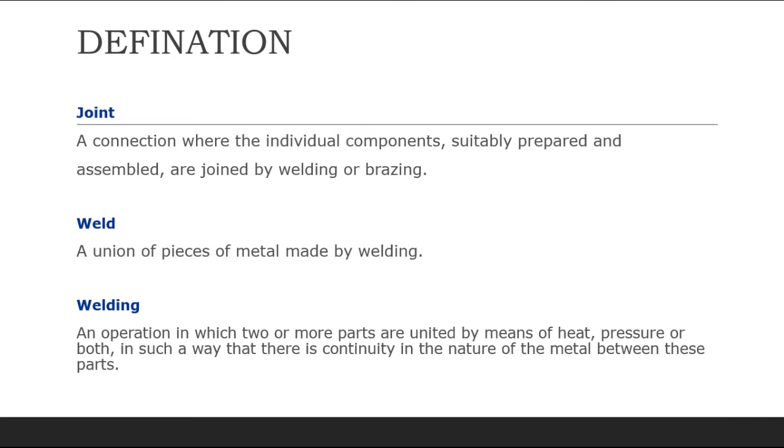Now friends, we will discuss welding - an operation in which two or more parts are united by means of heat, pressure, or both, in such a way that there is continuity in the nature of the metal between these parts. That is called welding. So in welding, friends, you can simply understand that two parts are there, and we weld them with the help of filler metal, by the help of heat, pressure, or both. This is called welding.

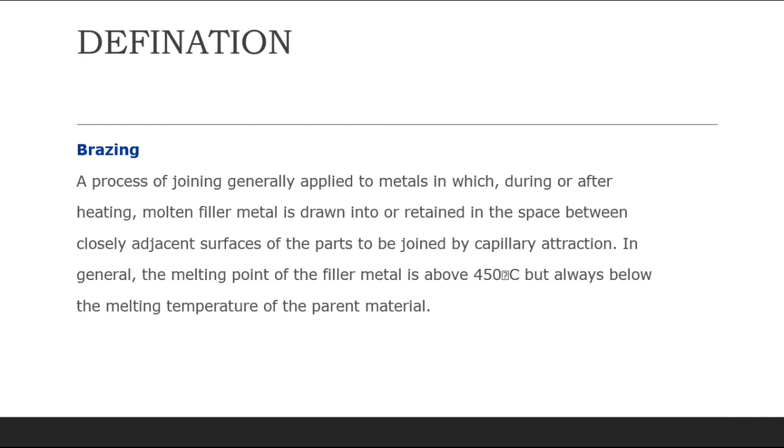So friends, next topic is brazing. Brazing is a kind of welding, but the main difference is that the filler metal has a characteristic in which, above 450 degrees centigrade, the filler metal gets melted and combines with the parent metal, forming a bond. So in brazing, the parent metal does not melt, because the temperature is only around 450 to 500 degrees centigrade. Only the filler metal melts and forms a layer on the parent metal - that is called brazing.

So friends, next we will discuss some joints, sketches and definitions. Number one, butt welding. In butt welding, two components are placed - this is basically a connection between end to end or edge to edge of two parts, and the angle between them is typically 135 degrees to 180 degrees. So you can see in butt welding, one end of the component and the second end of the component are joined, and this angle will vary between 135 to 180 degrees.

So second type is the T type. In T type, you can see two components going to weld. One component's end or edge will be welded with the other component's face. So you can see the connection between the end or edge of one part and the face of the other part. The parts make an angle to one another of more than 5 up to and including 90 degrees.

So the next type of welding is corner welding. In corner welding, you can see the two components have a connection between the ends or edges of two parts, making an angle to one another of more than 30 degrees but less than 135 degrees.

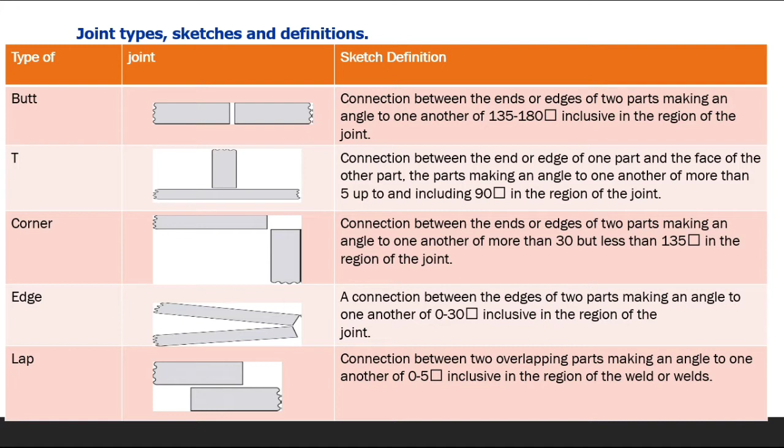So the last one is the lap. In lap, you can see the two parts having a connection between two overlapping parts. One part, and above it another part, overlapping the first, making an angle to one another of 0 to 5 degrees. So you can see all the joints.

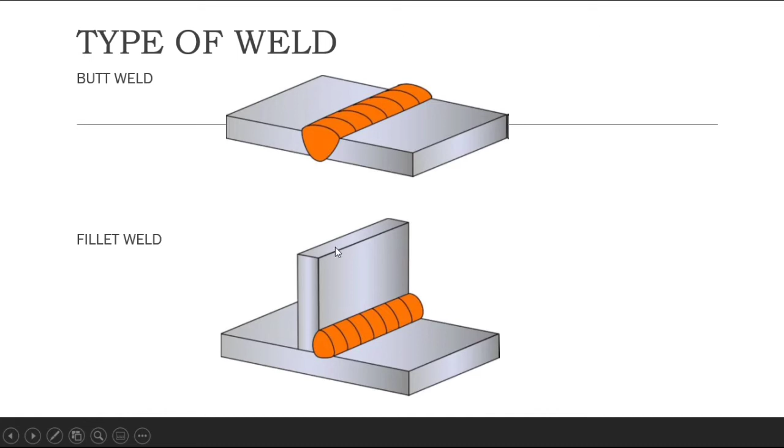In the next slide you can see the full penetration weld. In the top one you can see the full penetration weld, and in the bottom one the partial penetration weld. In partial penetration weld, the V is not completely made - the V is made in half of the component and the rest half is straight. You can see this.

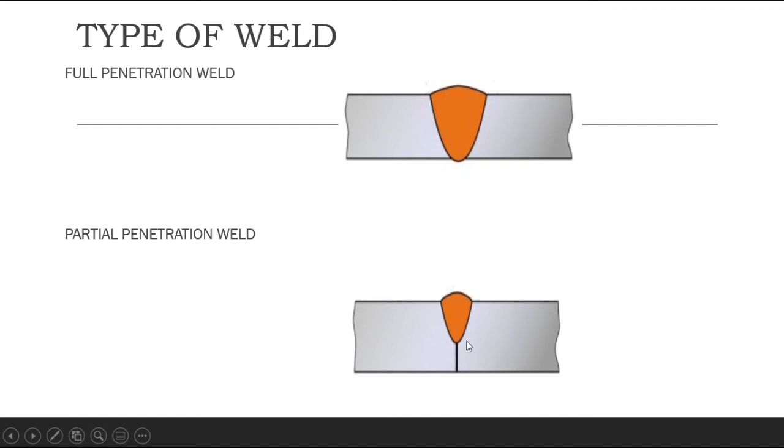So friends, now we will discuss some key features of a completed weld. We'll cover the definition later, but we can see some key features here. You can see the parent metal, the gray one - this is the parent metal. Both complete plates are called parent metal, and all this terminology will help you discuss with experts and clients, so you should know about it, friends. So this is the parent metal.

Now we will discuss the filler metal. The filler metal is the welding rod, electrode, or filler wire used - that is called filler metal. The third one is the weld metal. Friends, you can see the orange one, the red one - this is the weld metal. After solidification of the liquid weld metal, you can see the complete solid weld metal here.

The fourth one is the heat affected zone, HAZ area. People normally ask about the HAZ area. You can see the dotted line here - this is the HAZ area. How does the HAZ area come about? While solidification of the liquid metal, the temperature of the liquid metal is too high, and due to transfer of that temperature into the parent metal, up to the mark where it reaches saturation temperature - this area is called the HAZ area.

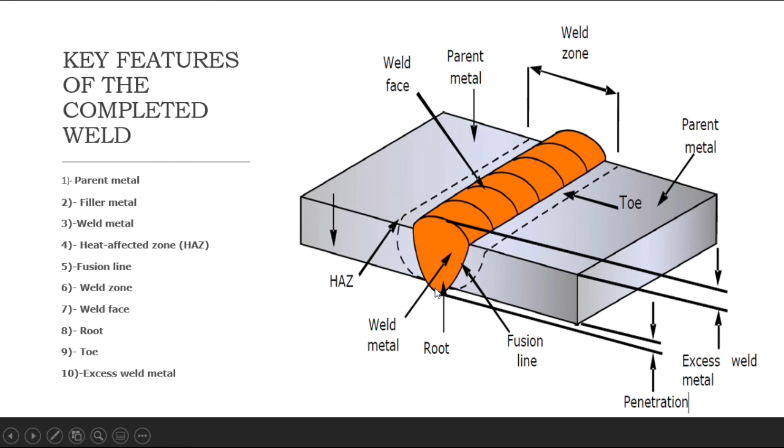The root is the zone on the side of the first run, further from the welder. This is called root - as I showed you, the welder starts welding from here and the first run is called root. You can see there also, this is the root. Root must be fully penetrated.

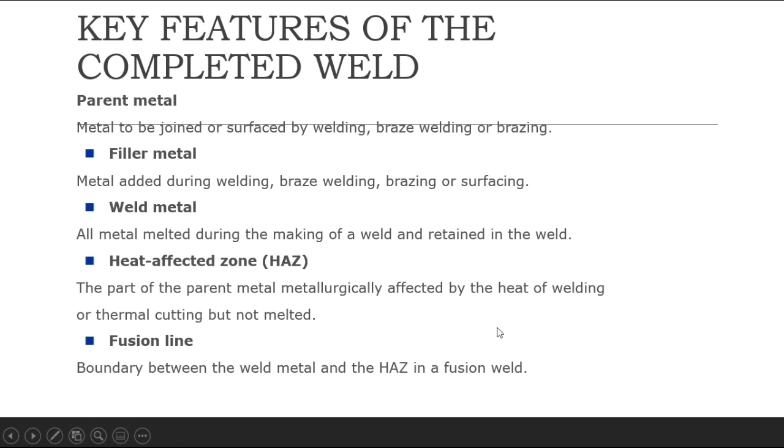Now we will discuss toe - basically the boundary between weld face and parent metal, or between runs. As I told you, the weld metal and parent metal transition area is called toe, and layer to layer fusion area is also called toe.

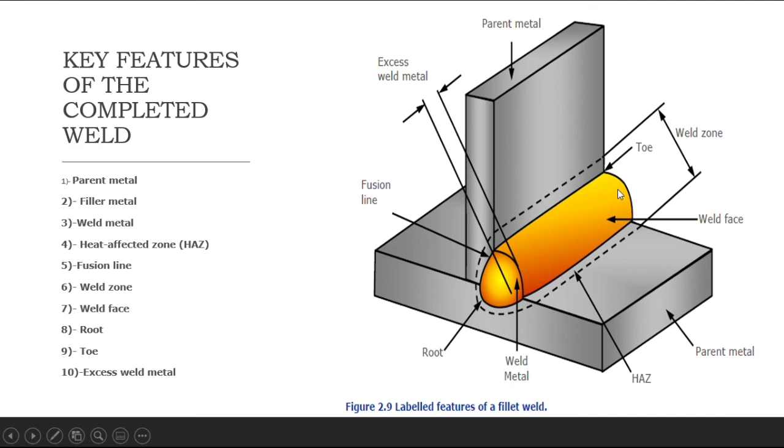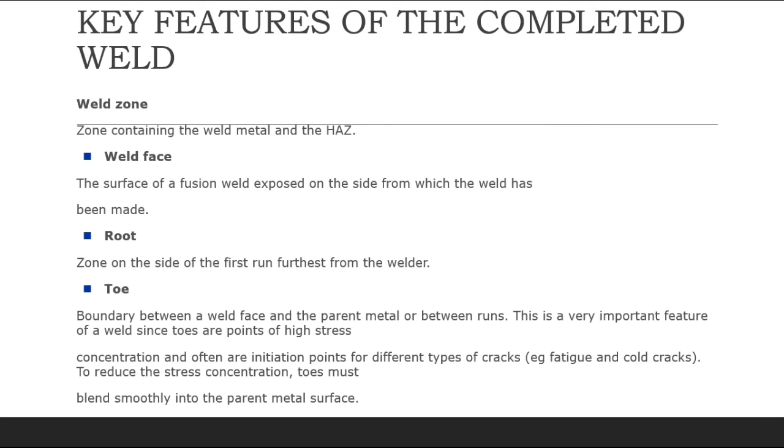One important thing, friends: this must be smooth. If toe is smooth, then parent metal will be safe and no cracking will happen. If it is not smooth, then due to stress concentration it often becomes the initiated point for different types of cracks like fatigue and cold crack. So to reduce stress concentration, the toe must be blended smoothly on the parent metal surface.

Excess weld metal, as I told you, is weld metal lying outside the plane joining the toe. Other non-standard terms for this feature are reinforcement and overfill. For reinforcement, the code specifies acceptance criteria - when the height is more than the given acceptance criteria, that is called excess weld metal, which is not acceptable.